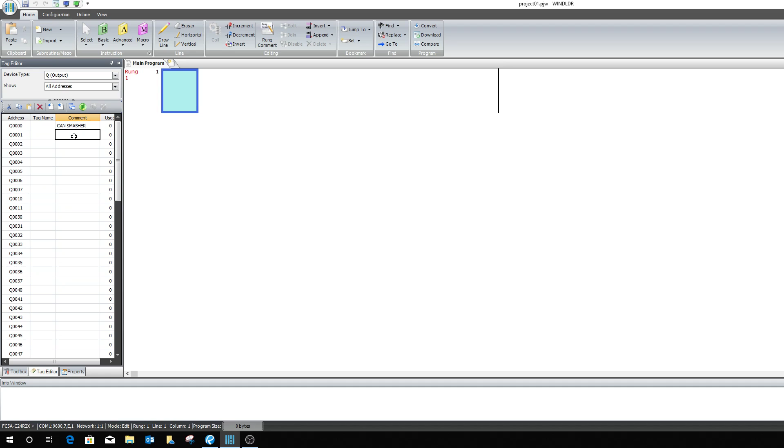So I'm going to go up here to my outputs. I'm in tag editor, remember, right here, tag editor. One of my outputs is going to be my solenoid to my air that's going to actually smash the can. We're going to call this can smasher. How about that? Alright, my second output is going to be my little solenoid that blows the can off. We're just going to call it eject air. How about that?

Okay, now I'm going to start in a sequence. This is how I would program something. I'm going to think from start to finish about how I'm going to do it, how I want the system to operate. So the first thing I want to do is when I put the can in there, I want a little photo eye or whatever, some kind of sensor to see that can.

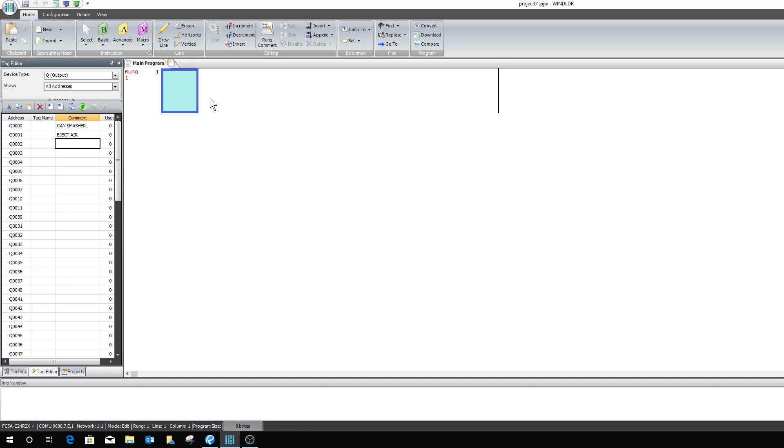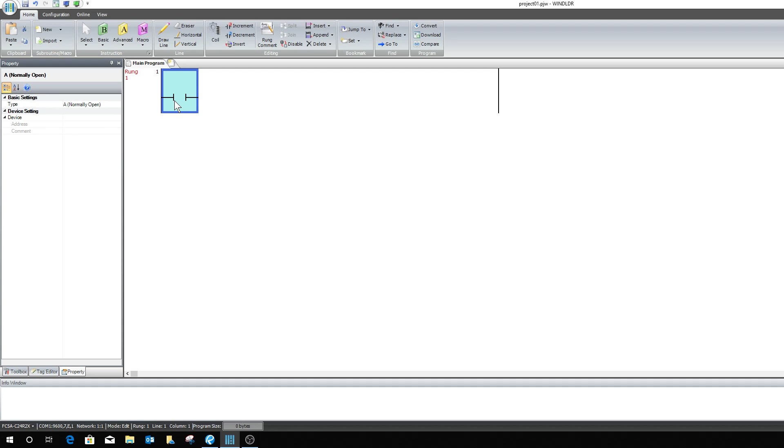Okay, so I'm going to go here to Toolbox now and start playing with this. This is where I'm going to put in my components. So that's going to be a normally open switch, actually, or normally open contact. That's going to be our can sensor. So I'm going to put that there, double click on that. Now I can go to this list, my can sensor's there, hit close, okay. Now it knows that is my can sensor.

Now I want that can sensor to do something. I want that can sensor to start a process of smashing a can. So we'll go over here and put us some... I like using sets and resets because we're going to use timers and all this, and I've already written this program, so I'm kind of stepping through it how I've written it.

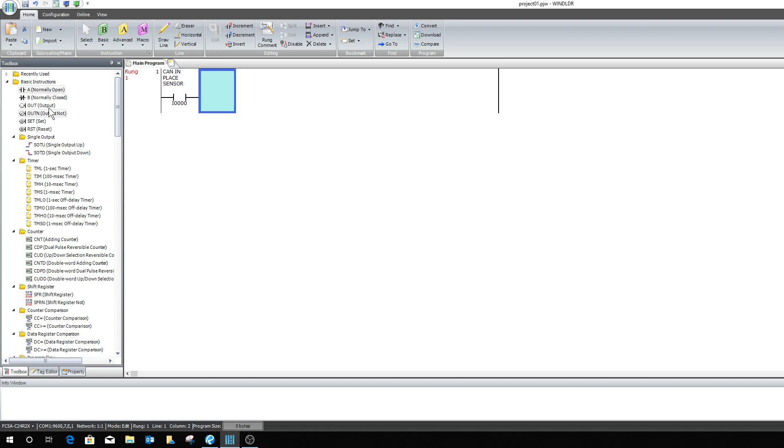So the next thing I would do is go ahead and go to Toolbox. This is going to be normally closed, going to be a safety. Your safeties are generally normally closed because they fail safe open pretty much. So here's my safety relay.

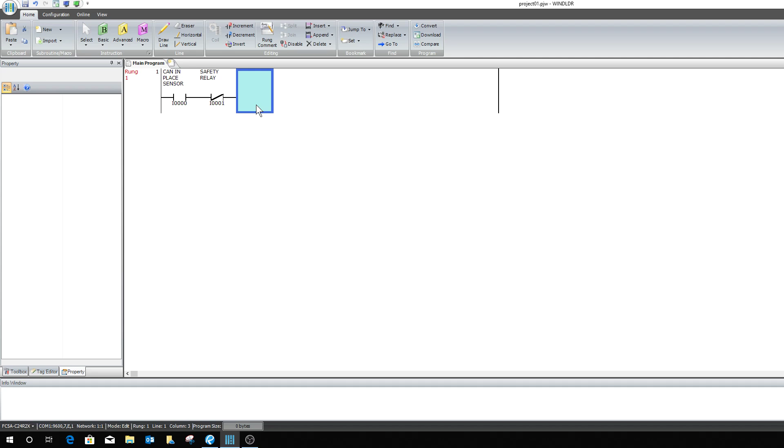Okay, I want it to see the can when you first put it there, but I don't want it to sit there watching the can the whole time. I want it to see the can, and then once you remove your hands out of the safety and it closes that I0001 switch, I want it to start a count. I don't want it to start while your hands are still in there.

So I'm going to make this a single output up. You can go to toolbox - there's other ways I like doing this, but I'm going to have to fight this a little bit to do it this way because I'm used to doing it another way. So there's my single output up, and what this does is makes it only look for the rising edge of these. When both of these are closed, these are ands - this has to happen, and this has to happen.

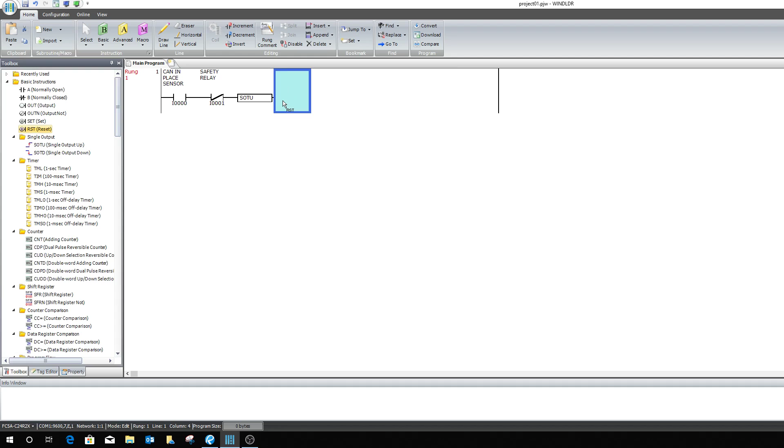Put that there - this reset, I'll show you how this works when I get it together. We'll call it M0 because I'm going to use a bit. Since I'm adding bits in here as I'm programming, this is stuff I normally don't know to go ahead and put in tag editor when I'm doing something. So I'll add these in the comments here as I go and tell myself what they are.

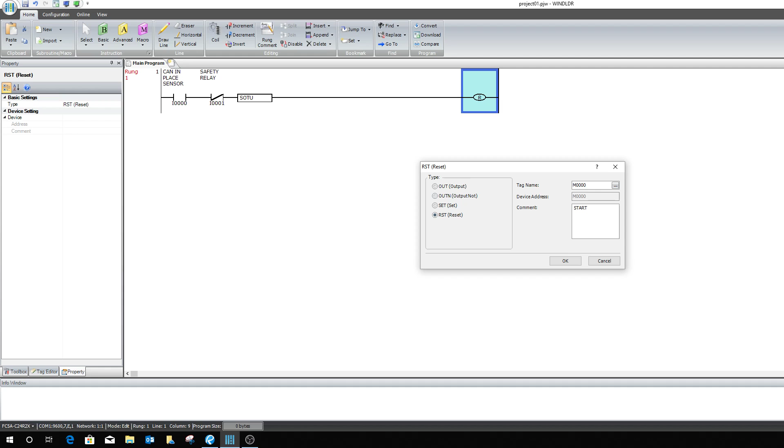Okay, this is going to be my start sequence. Okay, see, it puts it up there. Now if I go to tag editor, it's going to be in there - just so you'll know that it does put it in there.

Now I don't know why it's not showing the whole thing. There is a way, I've done it before, to make that spread out, but I don't remember exactly how to do it. One of the guys in tech support showed me how to do it, and I'd be dang if I remember how. Anyways, okay, moving right along.

Now that we have our - oh, I messed up there. But there's not supposed to be a reset, I must have grabbed the wrong one. Okay, this will show you how to do something anyways - if you get the wrong thing, that's supposed to be a set, not a reset. Just double click it and you can go here and change the function of it. Okay, so now that's a set.

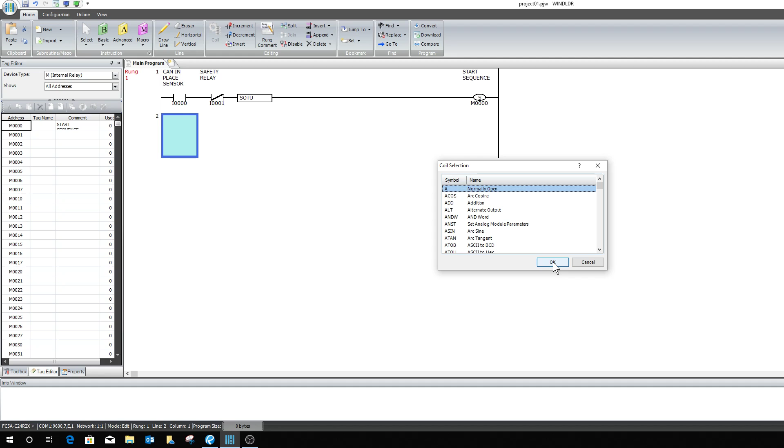I'm doing single keystrokes is how I brought that up. I should be showing you a toolbox, but anyways, that's how I did that.

Okay, now this, I'm going to use M0 again - start the sequence. From M0, now I want it to wait a second or two before it actually starts the sequence, once I move my hands, or whoever moves their hands, so that way it don't scare the crap out of them as soon as they move their hands and just start trying to smash cans. So you want them to be clear of it, give them a couple of seconds.

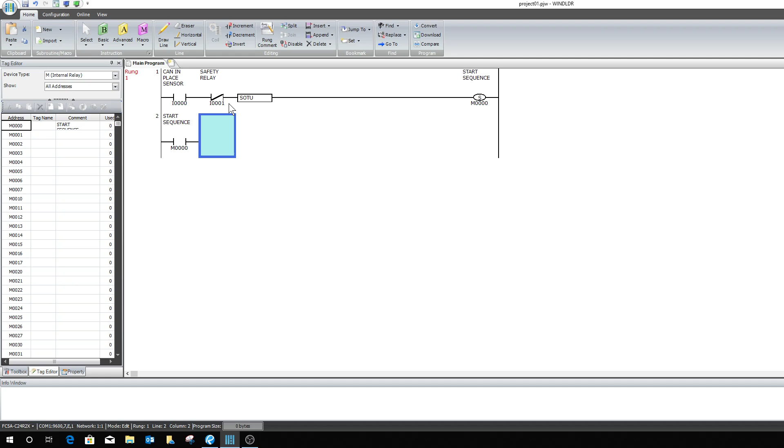So we're going to put a timer in here. All right, now timer, you go right here. I was fixing to do the keystrokes again - the timer, you go in here. TML is on, there you go - TML, 1 second timer. Double click on the timer.

Name the timer T0, will be your first one, and we'll call this the smasher delay. Go ahead and set it - we're going to set it for 3 seconds so you can kind of see how this works whenever I actually put it on simulate for you.

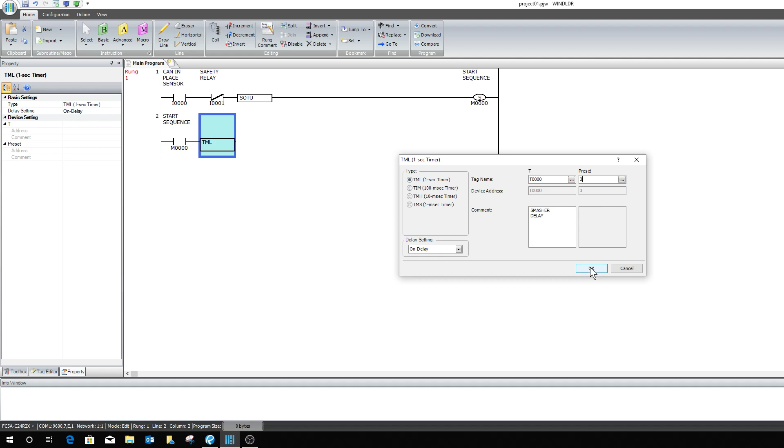All right, now I'm going to go ahead and give me another memory bit out here. So I'm going to go toolbox and output. Call that M1.

All right, I'm going to comment. This is going to start my smasher to go down. This is just a memory bit - it's not going to the output on the PLC yet because we're going to a timer first. It's going to tell that cylinder how long to stay down.

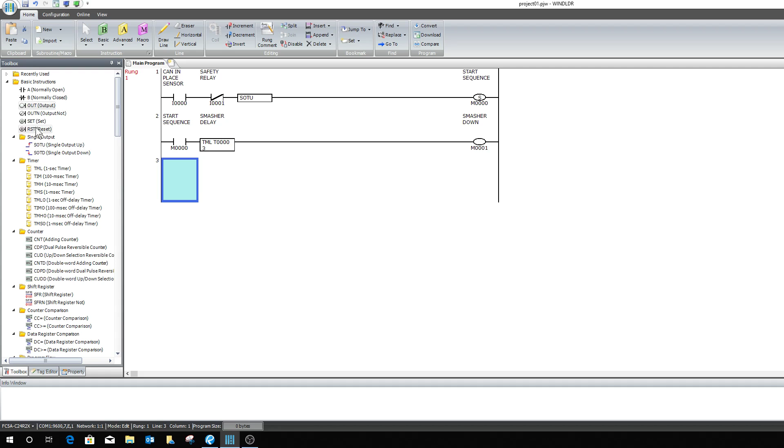So right here, toolbox, another normally open - that will be M1 as well. I'm not doing it the way I'm used to doing it, so I'm kind of getting ahead of myself. M1, enter. Okay.

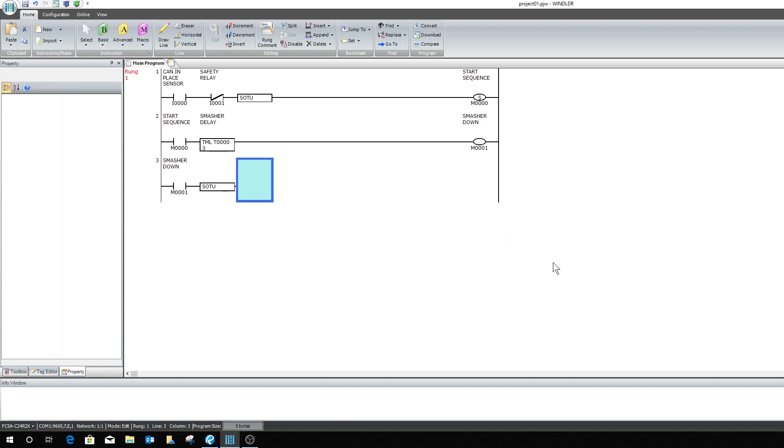Now I want this to be a single output up. I did that with keystrokes too - not meaning to show you not how to do that, but you can come over here, we'll get into that later. Toolbox - if you see SOTU, you type that in, that's the keystrokes. TMH, that's the keystroke that pulls up a timer. CNT pulls up a counter. OUT pulls up an output if you wanted to do it with keystrokes like I've been doing it.

Okay, so now this is when I'm going to set up my smasher dwell. Now this is going to be a time off counter, off delay timer. So this one I'm going to go TMLO - that's a 1 second off delay timer. Let's put that there. We're going to call this one T1.

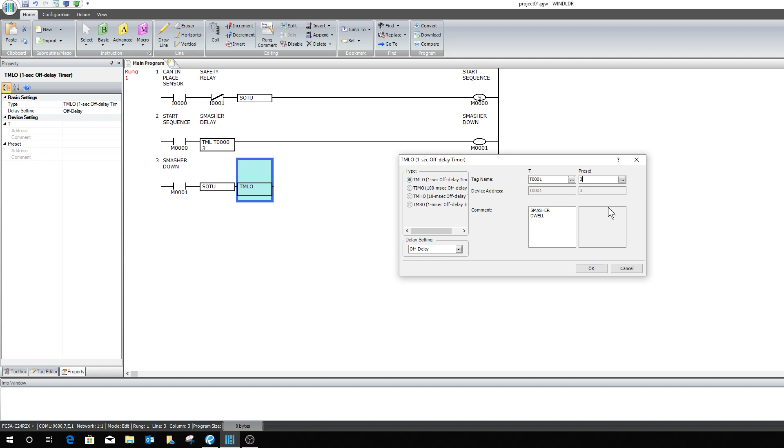We'll name it Smasher Dwell. Set it for a couple 3 seconds also - you're not going to dwell time something that long, but just for the benefit of us being able to see the program.

Okay, and this is going to directly run my cylinder. So let's go to toolbox, put another output. Okay, this is going to be Q0. That's our can smasher.

Now we have to have something to reset this whole sequence up here. So what we do here, we're going to go to toolbox. I'll show you how this is going to work real quick here in a second. We're going to make this Q0.

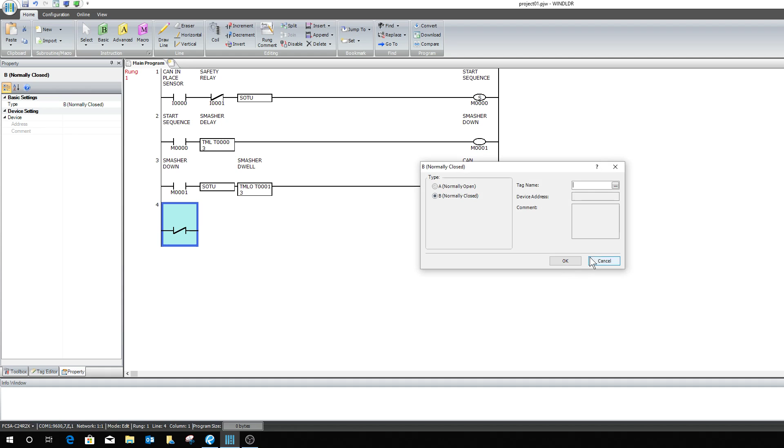I'm just doing it other ways to show you that you can do it all kinds of other ways. We're going to do a single output down. I did that with keystrokes, SOTD, brought that up. Now I'm going to go RST, that's reset.

And then I'm going to go to M0, enter. Okay, now basically we'll do this - this is the first half of it. All right, let's go ahead and we'll save it.

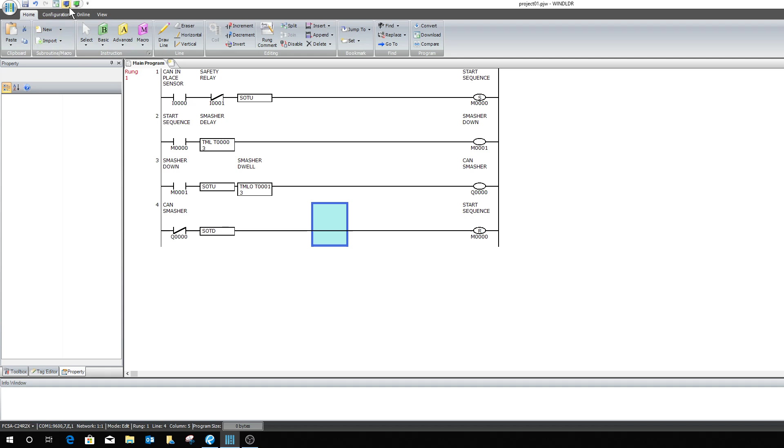And I'm just going to save it on desktop as Smasher.

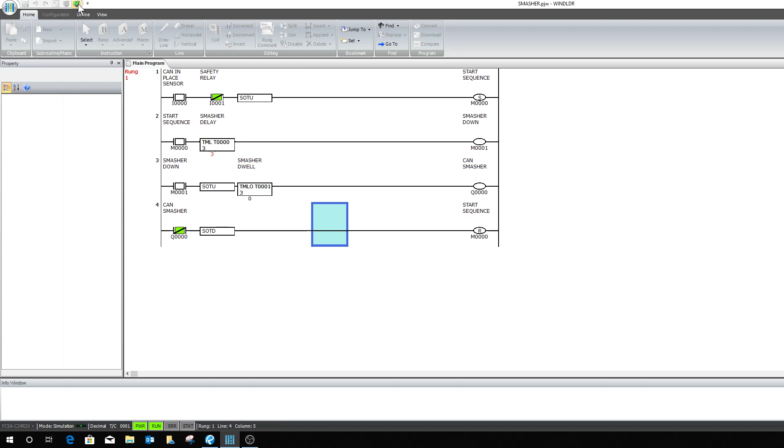Okay, anyways, now we go right here to the little green icon - that's your simulator. So now, if you'll watch what happens, we put a can in, it sees it. It's going to count down, turns on. There's the dwell time, counting down. It went off. Now, if you put a can in, can's there, bam, counts down, smashes it. All right, can smashed. I hope you got all that.

Anyways, okay, that's that part of it. Now let's start us another rung. This is going to be for our eject portion of it.

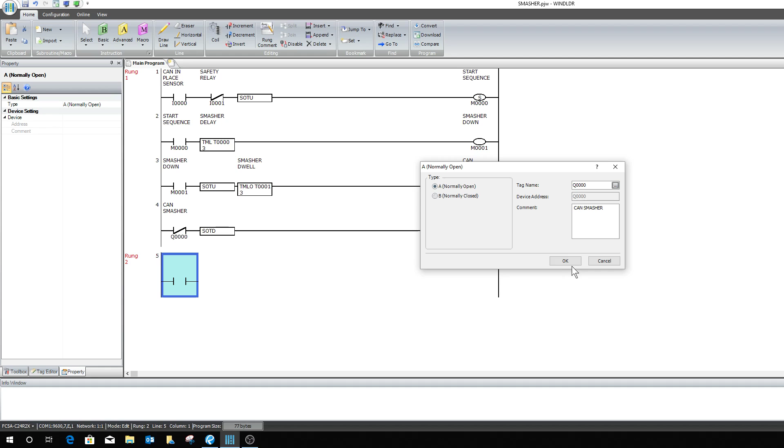All right, so let's go over here and grab us normally... I want to use my output to trigger all this. All right, so my can smasher, once Q0 turns on, I only want to see when Q0 turns off. In other words, I don't want this to blow on that can to knock it off until it's through smashing it.

So when Q0 turns off, the cylinder's retracting - that's when I want it to actually turn on this air solenoid. So I'm going to go toolbox, single output down. That means when it's on its falling edge - not this coming on, but transitioning from on to off - then it's going to do this function. Okay, so now we're going to start the air. This is going to be an off delay timer also.

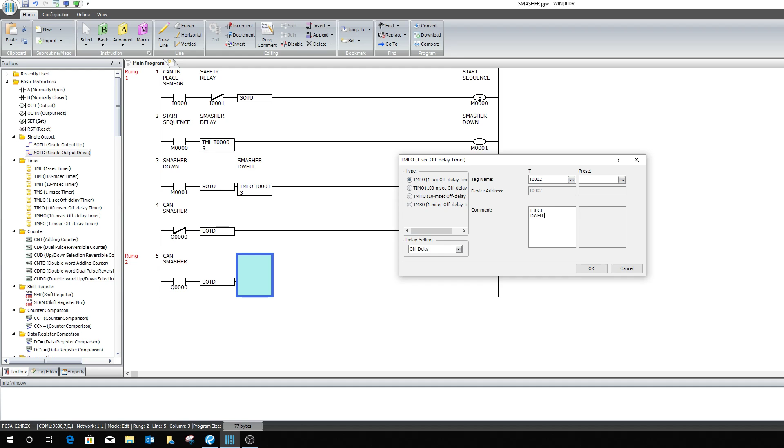Okay, this is going to be basically our dwell for our blower, tells it how long to blow a jet of air. We'll call this one... oh no, we don't want to use T1, we already had T1, so we need to use T2, and we'll call it eject dwell. We'll make this one go for 2 seconds.

Okay, now our eject air, that's output Q1, remember? So now we're going to put us another output. Go ahead and make that Q1. Okay.

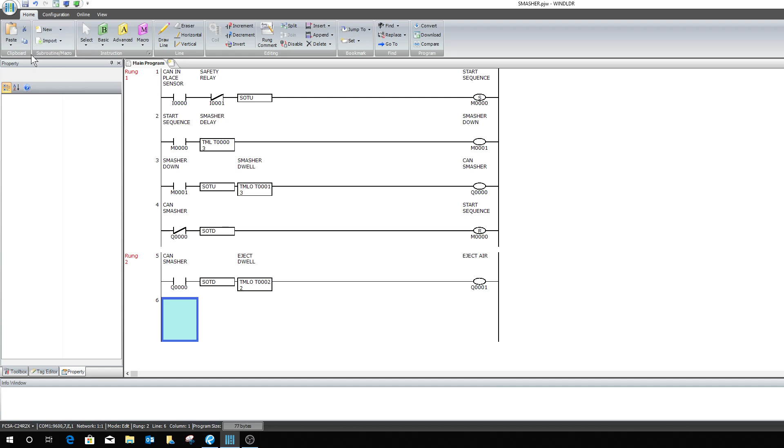And I think that should be it. Let's test it and see. Okay, can in place, goes off. Bam, bam. There's our air coming on, blowing the can off. Okay, did you follow all that?

Sends the can in. It counts down, blows it. The cylinder goes down and smashes it. The cylinder goes back up, blows the air off for 2 seconds, knocks the can out of the way.

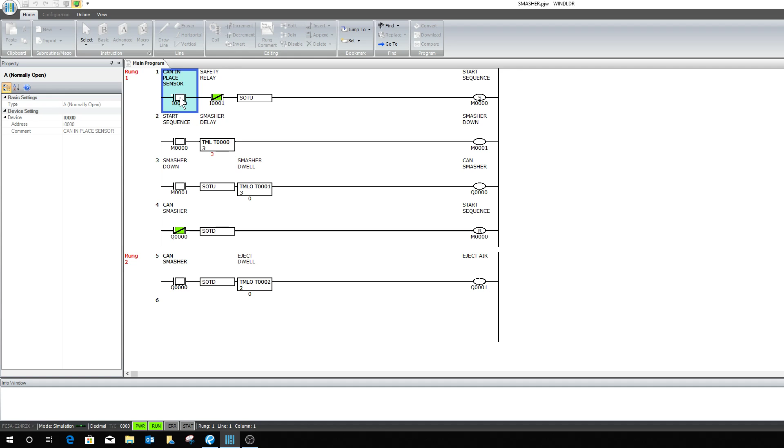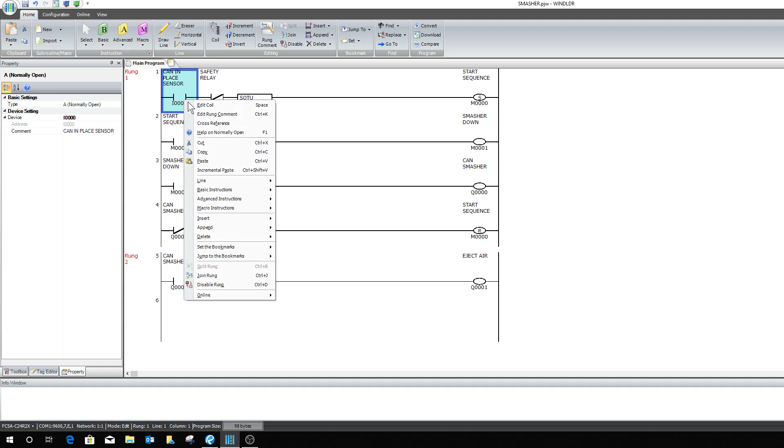Okay, one more thing you can do here to help segregate your components. This is something I like to do. If you right click anywhere in this, go under edit rung comment, and you can label your actual rungs to help you keep this in some sort of order. You can do it all kinds of ways.

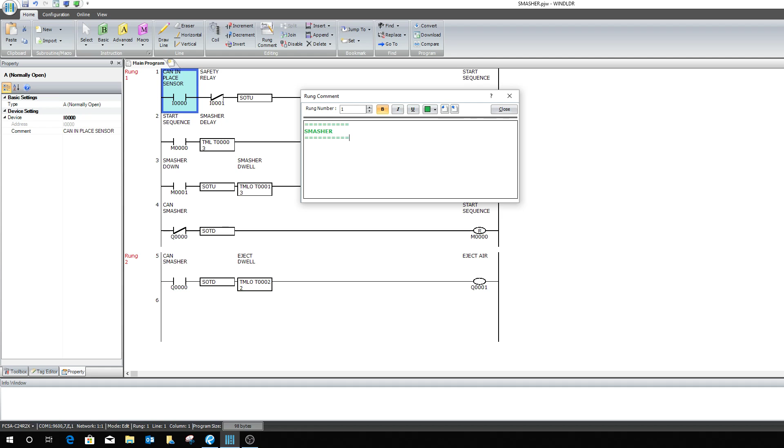I mean, I do it this way. Let's see, we're going to call this smasher. I like doing them in different colors, that way it helps me see them better. Okay, and to see it places it up here. I want something down here. Edit coil or edit rung comment. Same thing, I can go green.

I wish there was a way, I'm sure there is a way to default this to one color, but I have not figured it out yet. Or I haven't taken the time to figure it out yet, rather, I guess.

Alright, we're going to call this eject the can. Okay, see, it puts it all down there for you.

Okay, we'll save this. Anyways, the step through this is how this happens now. I00, when you put a can there, it sees it. If you have nothing in the way here, which your hands will be in the way, so that opens that up. As soon as you get your hands out of the way, that closes. It sends a single output up to this, which sets bit M00.

M00 then in turn delays for 3 seconds so it don't scare the crap out of you when it smashes the can before it turns on M01. M01 then comes on, and for one single output up, it turns on this off delay timer. Alright, when the off delay timer comes on, this turns on your can pretty much, and it holds it on for 3 seconds, then lets it turn off.